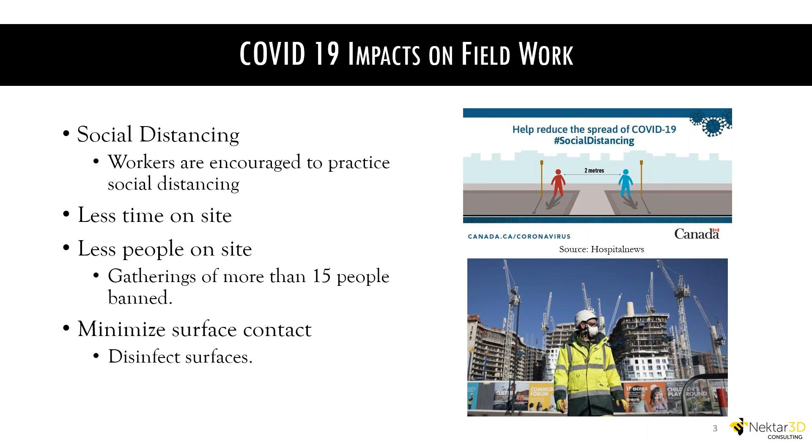Now, before I get into how LIDAR technology can help meet and manage those restrictions, just a quick definition of what LIDAR is. I'm pretty sure the majority of listeners already know what LIDAR is, particularly in the world of self-driving and autonomous vehicles. This is the same technology I'm going to be talking about, just using different scanning systems with different capabilities to get more accurate data and higher point density.

LIDAR is a remote sensing technology that uses light rays to collect positional information about objects. In mobile laser scanning, which is the most common form of laser scanning in transportation, a laser scanning system is mounted on top of a data collection truck, and as the truck drives down the road, it captures a 360-degree representation of the surrounding environment.

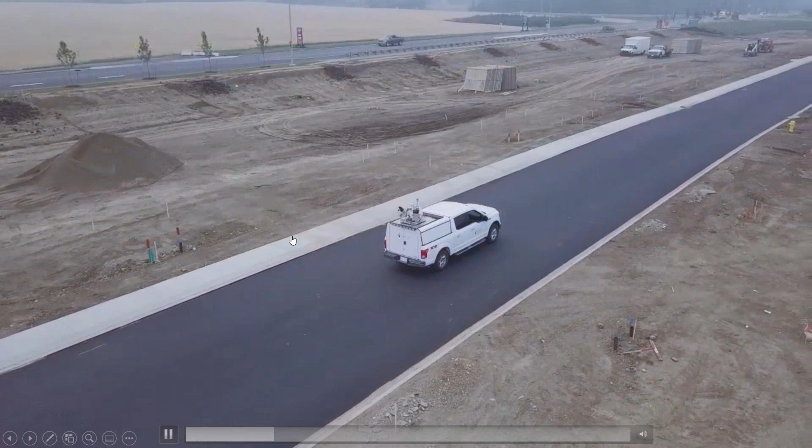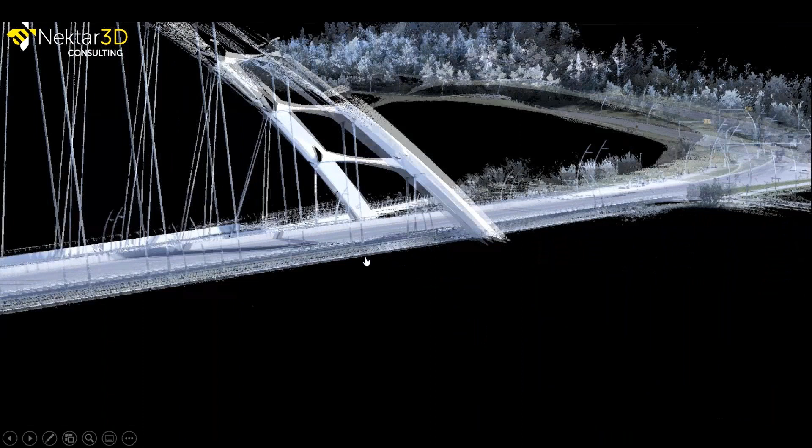You drive down the road at roadway speed, and as the truck drives, the system creates this point cloud that you see right here. Here's another sample of a point cloud scan. The way this data was collected on the Walterdale Bridge here in Edmonton was just by driving the truck down the road at around 50-60 kilometers an hour. So as we drive down the road, a single survey pass creates this virtual point cloud, this virtual representation of the surrounding environment.

Now, back to how the technology can help during COVID-19. As I mentioned, even though we're gradually getting back to work and opening up our job sites, we're still going to try and maintain our distances. We're making sure we're not making unnecessary contact with surfaces without disinfecting them. We don't want too many people making contact with the same surface, and we need less people on site as well.

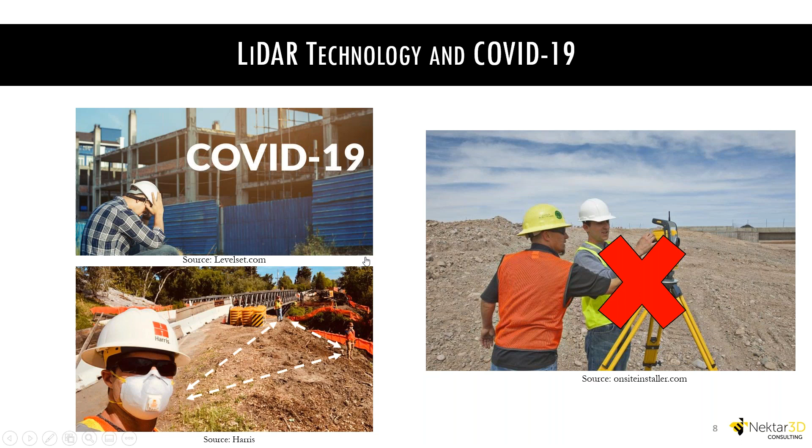Now, due to the way LIDAR data sets are collected, all you need to do is drive the vehicle with the scanner on top down the road. So you're spending much less time on site. You just need a single survey pass to collect all the data, and you also need less people on site. One person can operate the scanner and drive the truck down the road, constantly collecting the data sets. So you need less time on site, less people on site.

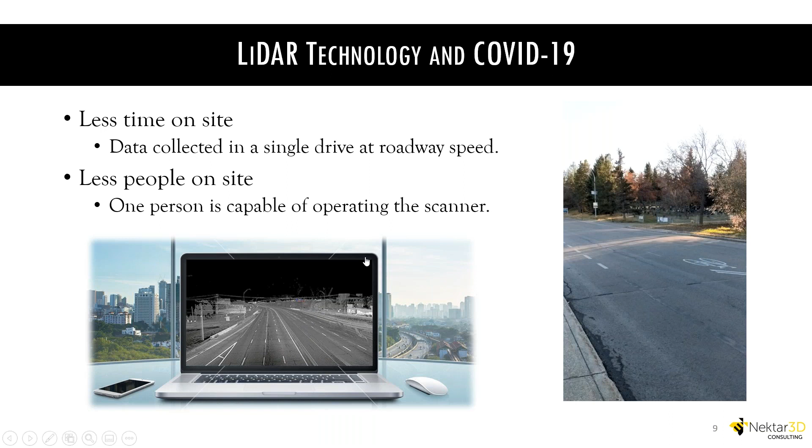You also need fewer site visits, because basically all the information you need is collected in that single drive down the road. You drive down and collect everything about signs, curbs, cross sections, road profiles. All the information you need is collected at once, so you don't need to go back to site. All the line work you see in this animation was extracted from the point clouds themselves. There was no need to visit the site again.

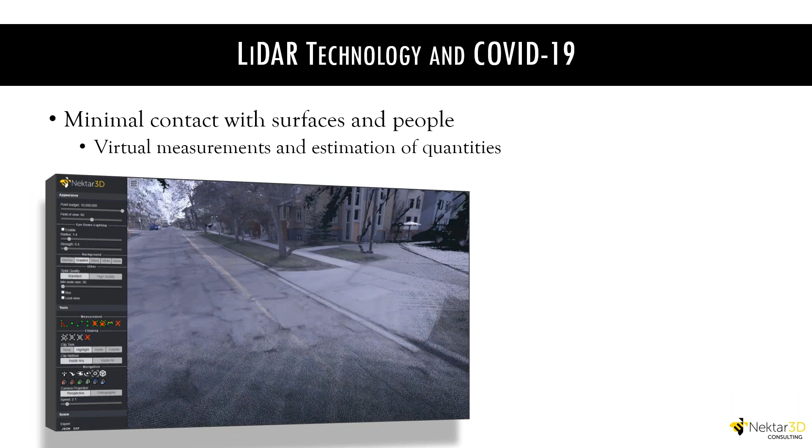Due to the virtual nature of the technology, you can also measure information and estimate quantities without making any contact with any surfaces or tools. You can simply go into those virtual point clouds and extract the information you're interested in, whether it's measuring areas, measuring cross slopes, or extracting information about your road profile. All that information can be extracted virtually, so you're not making contact with surfaces or using any tools to measure or extract that information.

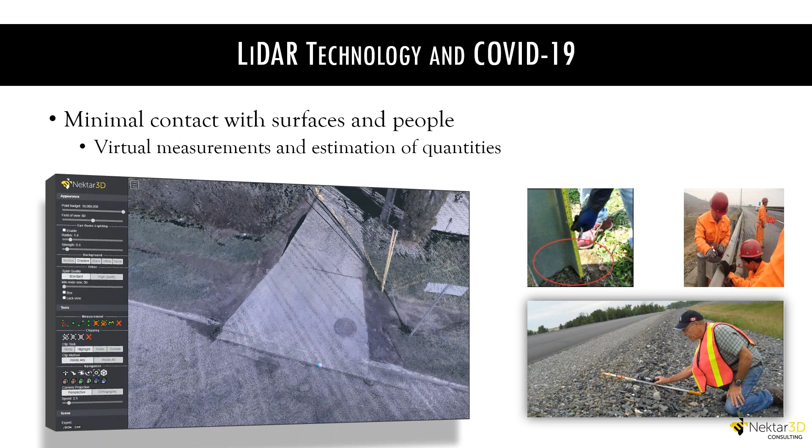Speaking of how virtual the scans are, they also facilitate virtual communication among project participants. So if I'm working from home and I've got a colleague working from their own home, and we want to conduct a virtual site visit together, we can simply do that by sharing a URL link. This is a link to a scan collected in Edmonton along 109th Street. You can simply zoom in and virtually visit that site, measure information if you're interested, verify and validate certain quantities by just sharing this URL amongst different project participants. All you need is an internet connection—no software installations, no packages, nothing.

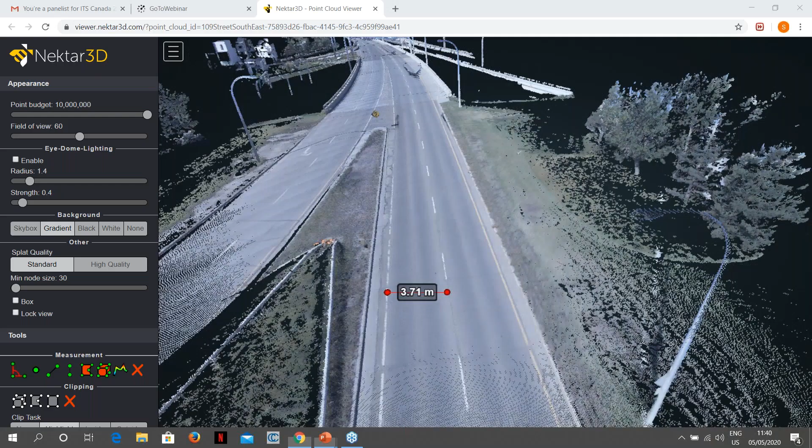And this is another link, but this is to an entire neighborhood. Here we have an entire neighborhood that was scanned in Edmonton, and you can access that entire neighborhood by just sharing this URL link. So it's a virtual scan of that entire neighborhood. You can go in, measure information, verify, validate, and so on.

So the big question now is, where is this technology valuable? What transportation projects is it most valuable for? The benefits lie in lots of different projects, at different levels. Regardless of what project you're working on—grade widening projects, functional planning studies, topographical surveys, neighborhood renewals, bridge inspections, and all those listed here—those transportation projects can benefit from the technology at different levels and at different phases as well. You can benefit during planning, during design, during construction, depending on what your interests are.

Now, with what remains of this presentation, I'm going to talk briefly about the Nektar data management platform and how we can manage documents, performing paperless management of documents using the platform. The Nektar data management platform is a cloud-based asset management platform that facilitates management of transportation assets, equipment, green spaces, as well as documents. Lots of clients use the Nektar data management platform to manage their payroll documents. It's an app-based platform where you scan a QR code for your document or asset, and that brings up an asset attribute table, and then you can assign work orders and different tasks to specific assets.

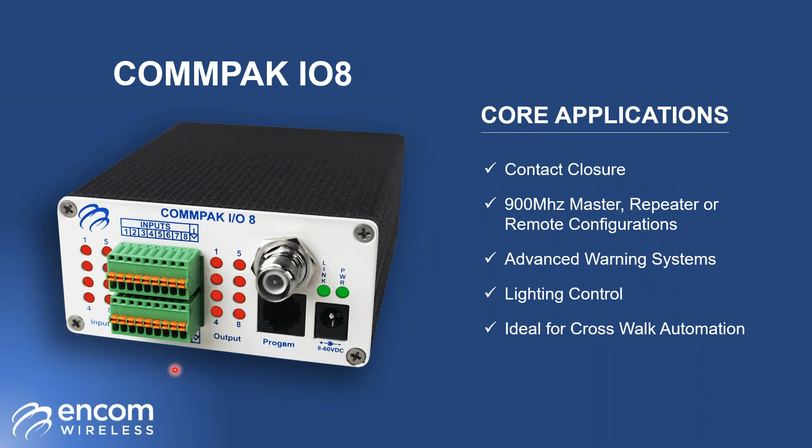Now, if you need analog and digital inputs on your remote, then we would suggest something like the SBX Remote IO. I only have 10 minutes, so I'm really motoring through this, but these are the components that are enabling us to provide that remote control and remote monitoring of beacon sites or any sort of sensor you have out in the field, and you'll be able to monitor it from the comfort of your office chair in your management center.

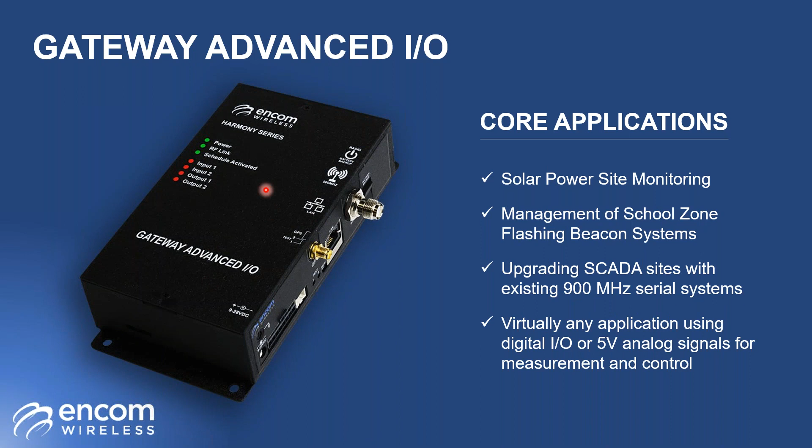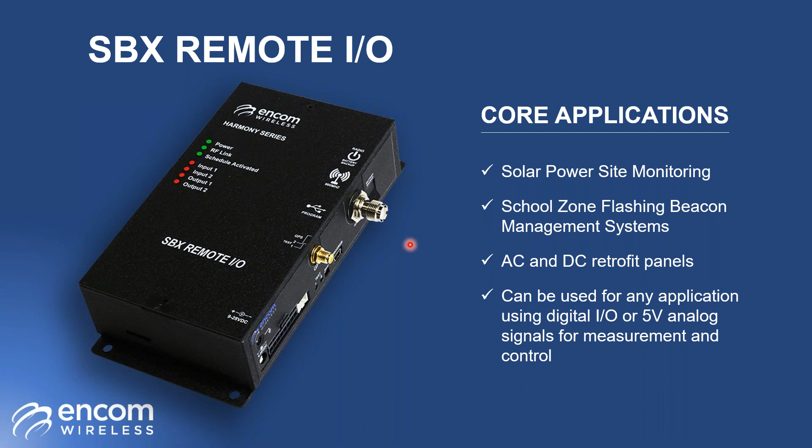So solar power site monitoring, done—this unit can do it. School zone flashing beacon management systems, done. With school zone systems in particular, you can use a combination of this unit and this Gateway Advanced unit, and all the schedules for that site will be in this unit, and it'll flash the pertinent schedule to each remote in the field. No longer do you have to go to a school zone beacon and hook up your computer to flash the schedule and make sure the time clock is running properly. You can do all of that from the comfort of your traffic management center.

Obviously, there's a lot more to talk about in terms of the technical parts of these systems. However, this is a great example of how it works in a system. So you have your municipal WAN right here, be it fiber, wireless, broadband, or cell.

Breaking off of that, you can attach a gateway, say, to a city hall or a library, wherever there's a fiber access point. Then you can connect your SBX remotes here and monitor your school zone beacons. This could be miles away. Line of sight is no longer an issue because we can tie into your municipal WAN.

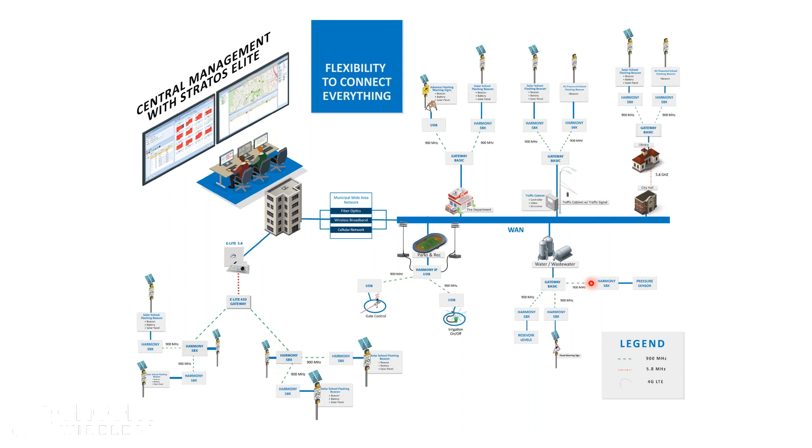We can also manage lighting systems for parks and recreation. We can monitor very important applications in the water and wastewater world—water levels or whatever it may be. The applications are virtually endless, and they can be controlled virtually, which is fantastic.

So just a brief overview of some of the things you'll be able to do. You can use Stratos or any SNMP enabled central management software with any IP network, and basically you're bringing on devices that previously you had no visualization to. You had to be on site. You can now do that remotely.

So here are some of the features we can do using school zones as an example. You can create, download, and manage all of your schedules. You can manually override from the comfort of your own chair. It's a very simple and powerful schedule editor, all done by drop-down menu.

You can import, export, and then flash those remotely. You can synchronize all the time clocks across all school zone clocks. And more importantly, you can see every detail of the beacon schedule, the current time, and anything else you want to monitor. So that is all I had today.

I hope I came in under my time, Yannicka, and that's all I have. Any questions? Yes, you did. Thank you.

Question for you: if any of your equipment currently needs to be serviced in the field, what precautions have been put in place to do that with respect to COVID-19?

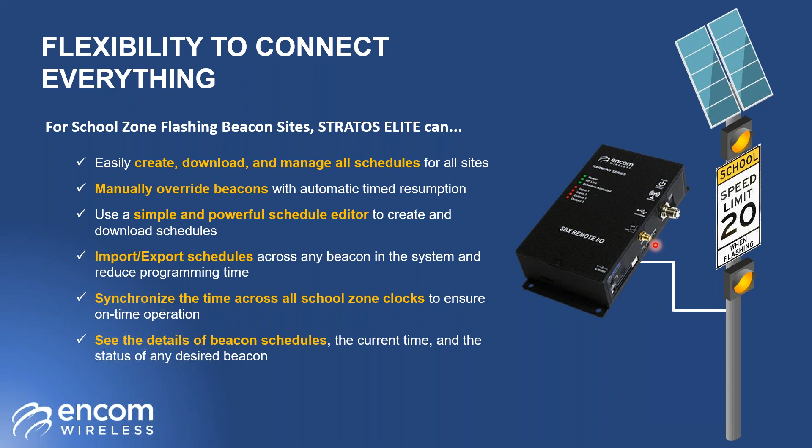I think that what has happened with COVID has really put an emphasis on the importance of doing what you can do remotely. You need to be able to increase efficiency and productivity remotely. So from a business standpoint, I think that has pushed that idea to the forefront of our customers' minds, and we are here, ready with solutions ready to go, and we will help everyone achieve their goals remotely.

Thank you very much. And those were my questions. Thank you, Travis, very much for that.

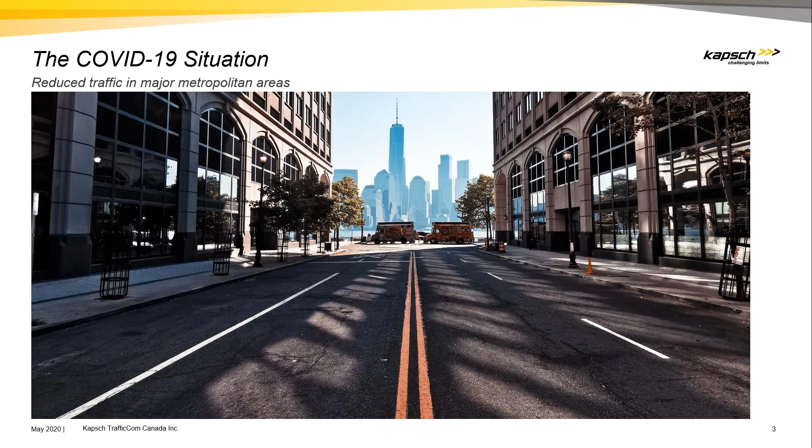However, essential workers such as doctors, nurses, grocers, commercial drivers, and delivery couriers are still commuting. And except for those who are self-quarantined, many citizens still have to make trips to purchase essential supplies. This is in addition to many places that are starting to open up.

So what are governments doing? Governments are implementing emergency actions to help movement happen more easily. Examples of those actions can be adding new bike lanes, retiming traffic signals, closing streets to help facilitate walking and cycling, or even suspending tolling on some key express lanes.

Implementing such changes to the traffic of a city or a region presents challenges and raises many questions. Here we have some examples of those questions. When speaking of new bike lanes, how can we determine which avenues are no longer congested during peak hours, and maybe that makes them good candidates for those new bike lanes?

Or regarding signal retiming, how do we identify the corridors that would benefit from that? Road closures, how to ensure that a road closure won't congest traffic in the surrounding area? Or regarding tolling, how to detect potential congestion on a corridor due to suspended tolling? So those are questions that come up when making changes to the traffic of a city or a region.

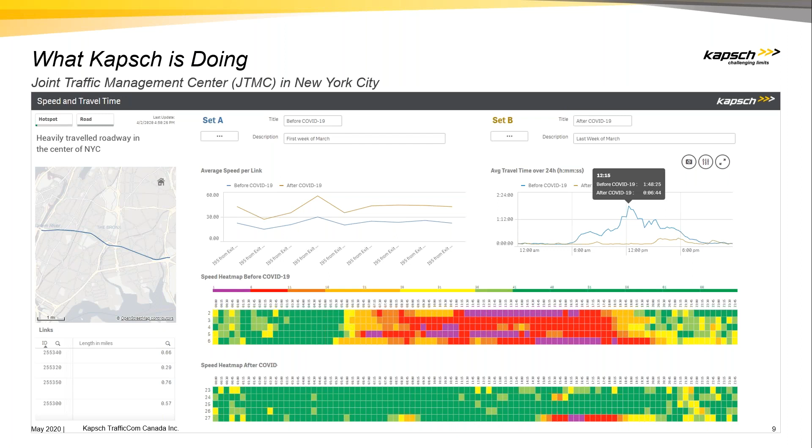This is an example of a dashboard that we're using in New York City. The Kapsch team supports the Joint Traffic Management Center, JTMC, by creating before-after analysis of all the major roadways in the metropolitan area. The results identify where congestion has disappeared because of coronavirus effects and which locations still present traffic slowdowns and why - it can be due to crashes, due to traffic merging, etc.

More examples. In Dallas-Fort Worth, the North Central Texas Council of Governments, NCTCOG, is using performance analytics insights to measure the decrease in accidents reported by the Departments of Transportation and the variations of traffic speeds and travel times on major freeways and arterials in the region.

And I'm going to share with you a brief demo of this performance analytics insight tool. I'm going to start by picking a date range, in this case, the whole month of March, Monday to Friday. So we're going to be looking at weekdays for US 75 southbound, which is one of the major freeways we had mentioned.

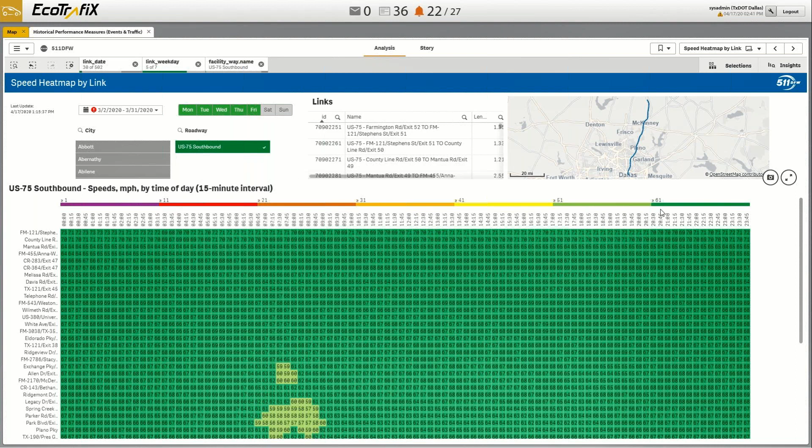And we're looking at average speeds for each of the segments of the road moving towards Dallas. These average speeds, we can see some congestion when we get closer to the Dallas downtown. That's a reason why we're going to do a selection and focus on that segment of the road. But we want to see results by day.

If we want to measure this change, we can go and create a chart where we can, for example, compare in March, weekdays of the first week of the month, which is before social distancing measures, and compare it to the last week of the month of March, those 5 days. Now that we have the selection, the results are what we were looking at before.